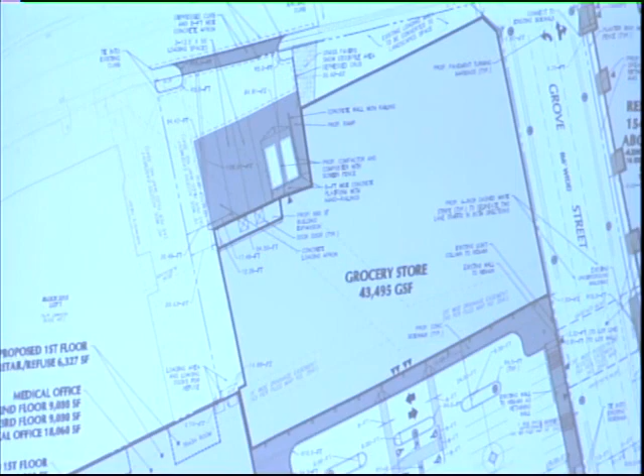Based on some comments we heard at the last hearing, and further discussions with some of the neighbors, we reevaluated how that truck access should work, how to make it more efficient, how to make it safer, how to make the pedestrian crossing better. So what we've come up with is a single driveway opening of now 78 feet, whereas before we had a 70-foot driveway and a 33-foot driveway. So the combined opening before was actually larger than what we have today, although in a single driveway it's larger than either of them were in this proposed condition.

What's shaded in gray along Glen Ridge Avenue would be a concrete driveway apron, so we'd have a formal depressed curb driveway apron to help identify the pedestrian way for pedestrians as they continue along Glen Ridge Avenue in either direction. It will be well marked.

The other difference that we've done is to accommodate comments regarding how we would deal with snow removal and can we create a stockpile area. And what we've done in this area on the east of the loading dock is to create a space.

It's about 550 square feet that would be curbed off on the loading dock side with the depressed curb. It would be grass pavers, providing an opportunity for snow removal and maintenance of that dock area to keep it open, and in fact the adjacent shared spaces without interrupting the landscape. So that's all new green space from the plan that was originally presented. There's no reduction in the landscaping along the Glen Ridge Avenue corridor as a result of that.

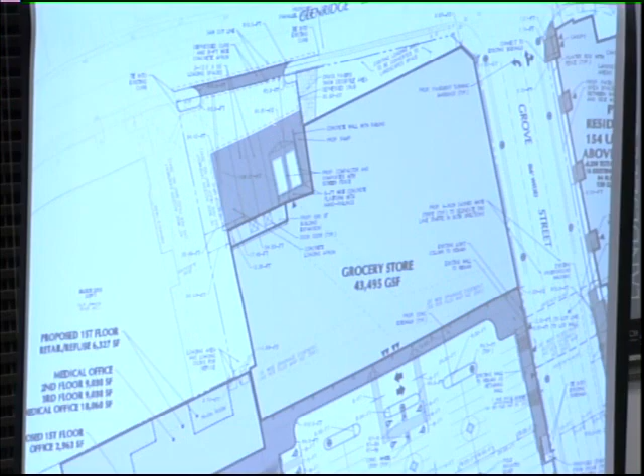There's also a ramp up that would be for essentially hand trucks and hand carts and things like that. There are opportunities for smaller trucks to park in front of the compactors to offload their smaller items without interrupting the activities at the formal loading docks.

We anticipate trucks would generally be coming from Grove Street to Glen Ridge, making a left onto Glen Ridge and then backing into these two spaces. The 78-foot wide opening we have does accommodate movements for those tractor trailer movements, so that if either one is occupied, the other is accessible. We have tested that with the large tractor trailers, the 53-foot trailers that are permitted on roads in New Jersey. We will certainly provide, as part of a revised plan submission, those truck turning templates demonstrating those maneuvers.

One of the other changes to this plan relative to what was previously submitted is there are 3 parallel spaces today along the southern side of Glenridge Avenue in the current island configuration. The prior plan would only preserve one of those spaces. This plan actually does that one better, so we lose only one - it's a net loss of 1 space were we to move forward with this alternative plan, with the board's wishes.

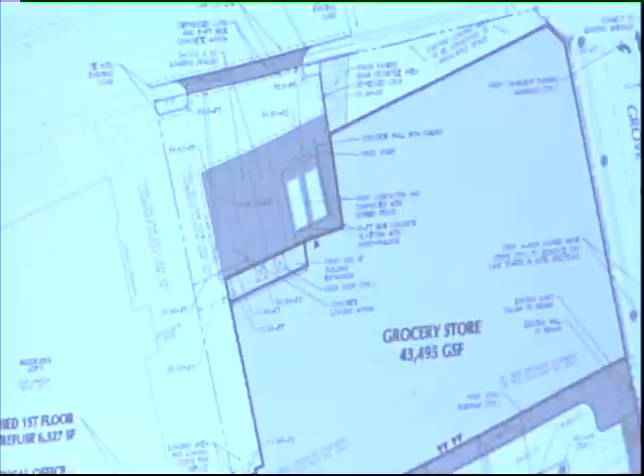So I have a question. At the last meeting, I asked, and I think this is for you, since you're talking about that area - are you going to prohibit the trucks from making a left-hand turn when they get out, so they're not going up Glenridge Avenue into the commercial and residential area of, I guess it's Greenwood?

What we've done is tried to do a regional analysis of where we think trucks would be coming to this facility from, and I generally agree with you that they'll be coming from Grove Street in a north-south direction, depending on where they're coming from, or potentially be better suited for Bloomfield Avenue. So we respect and understand that that restriction makes sense. The one thing we don't know, because we don't know who the tenant is, is exactly where their distribution facilities will be, so I think that's a common sense plan. I don't know that we're able to say there should be a formal restriction on that without knowing the tenant, but in general we would expect the traffic to turn right out of there.

Okay, but I would just like to make a note of it. I think it should be prohibited from making a left-hand turn, because a natural turn would also be a left into the residential area, or going up through Glenridge Avenue into the center of that corner where there's a lot of traffic issues anyway.

What about a certain size truck - I'm thinking the tractor trailers, right? Yeah, exactly, certainly that's our expectation in talking about that potential restriction on tractor trailers. Vans and regular box trucks could go, but when you're thinking big tractor trailers, when they're braking they make noise - you don't want them going through a residential area. No, they're very disruptive.

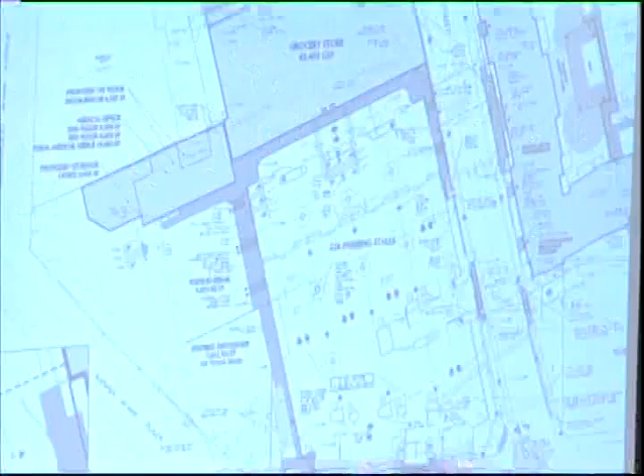We've confirmed that from Bloomfield Avenue, the ladder truck can traverse northbound through the main aisle, make a left-hand turn to park and put its outriggers out in front of the building, and can exit the site in a counterclockwise direction out through that same Bloomfield Avenue exit without any modifications to our current plan. There's adequate clearance to accommodate all those turning movements, and we have tested that. We will present those turning movements as part of a revised plan submission.

There was also discussion about fire lanes along the front of the building. The western three-quarters of the frontage along the grocery store would be striped as a fire lane. This eastern portion would not, frankly, because the fire trucks aren't accessing that area. So we're proposing to use this area outside the fire lane as a ride-share drop-off, loading and unloading space, providing the opportunity for an Uber or Lyft to pick someone up or drop someone off there. We could sign it appropriately. We don't intend these to be parking spaces per se, but they would provide that opportunity. It can be dedicated and signed in a way the board feels appropriate.

Do you know the size of that area you're talking about, how many cars? It's probably around 60 feet. So you could fit three cars there. Well, I would say two comfortably, maybe three depending on how cozy they get to each other in terms of parking.

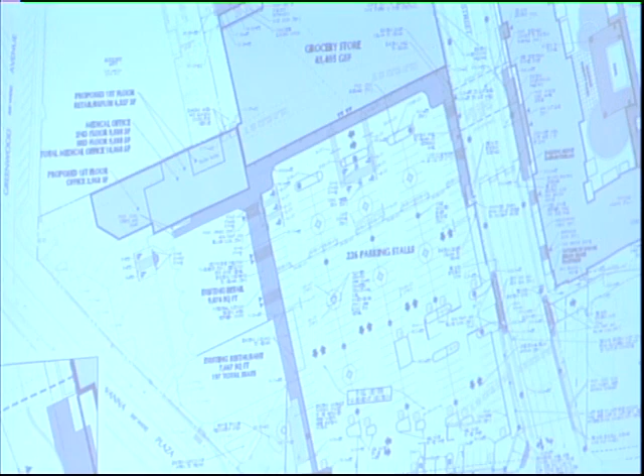I have a question about that. Where do you anticipate employees entering? Is there a separate employee entrance? That's where I can see a need for some employees to come by bike. Where would they enter the building, and how could a bike rack relate to that?

At this point we're not quite sure. That could be some tenant-specific requirements about how they may want to segregate employee entrances. I think your point's well taken, though, to the extent that can be identified, we can incorporate that opportunity for employees. Certainly I agree there's some opportunity there, particularly if they're local, since they're not the ones carrying groceries home necessarily.

In addition to employee parking, at some point I guess we'll talk about that? Not tonight, but yes, that's part of a future testimony by a traffic engineer. Okay, great.

I know there was some back and forth relative to an area we had identified on our site plan, an opportunity for seating on the eastern side of this retail space. That still exists. We wanted to clarify that we understand there's concern about potential incompatibility of the programming of that space — the type of seating appropriate for one tenant may not be for another. Without knowing who those tenants are, we want to create the opportunity, but the formal programming will have to wait until we understand the tenant mix, and it may even be specific to each individual retail space as to whether it's appropriate and how it can be designed.

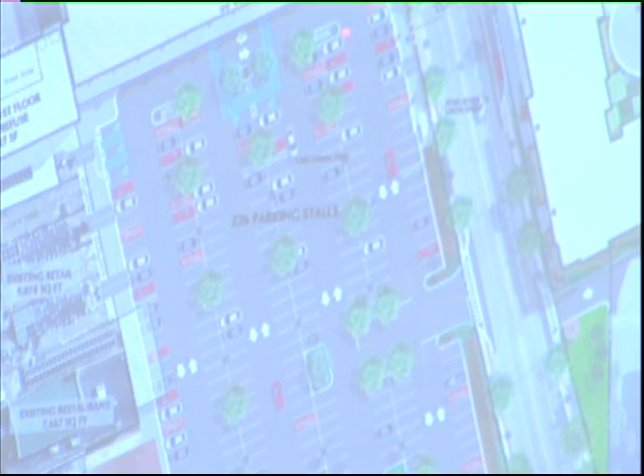And can you give the board the benefit of understanding in terms of trees being removed or replaced? Sure. There's a total of 30 trees being removed on site, and as I mentioned earlier, 48 trees are being proposed. And that's in compliance with the township's ordinance requirements on tree removal? Yes, it is.

So now, moving forward, I'd refer or ask the board to refer to the lighting plan that was previously submitted, LL 101. And there's an exhibit on the screen—is that the same exhibit that was submitted with the board's package? Yes, it is. It's drawing LL 101.

So could you please describe for the board the existing lighting and any proposed changes with regard to fixtures and light levels for the parking areas, sidewalks, and residential amenity deck on the east parcel? Sure. The streetscapes are typical public service cobra heads, high-pressure sodium. Within the parking lots, they're the old shoebox style, I call them—the square heads. They're in very poor condition. That's on both lots, that fixture style.

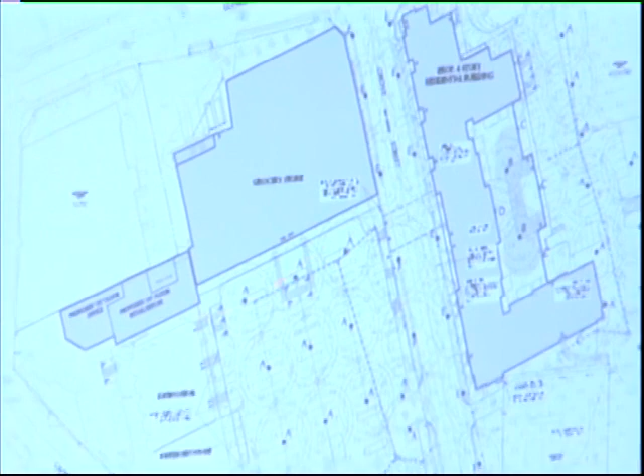Can you describe the location of the decorative street lighting with respect to the frontages along Lackawanna Plaza and Glenridge, west of Grove? Sure. The lighting is basically type E and F fixtures going down Grove Street, and Bloomfield Ave has the same fixture. At the corner of Lackawanna and Bloomfield Ave, in the plaza, there are two existing lights off-site that will be maintained, so there'll be adequate lighting in that plaza area, and the rest will be contributed by the decorative lighting.

What's the intensity in the plaza—how many foot candles? The intensity in the plaza from the point-by-point calculation shown there does not include the lighting from the street, so it's a little lower than just 2 foot-candles, but with the street lighting it would be higher and meet the town's requirement.

So would it be fair to say that with modeling we believe we'll meet the required foot candles, but to the extent we don't meet it, we would accept as a condition of approval that we'll comply? Correct.

I think you should show a plan that demonstrates compliance.

Revise it to show that you comply. We'd have to reach out to Public Service to see if we can obtain those photometric files and run them in our calculations. Get them all.

If you don't mind, I ask this question. How come you don't extend those decorative street lights along Lackawanna Plaza? Basically, because of the size of the plaza, if you start adding more poles in close proximity, the lighting levels may exceed that 2-foot candle requirement. I know we're a little high just at the entrance area here, but that's basically one of the reasons. I'm talking along the street, Lackawanna Plaza. I believe that's outside of our site, so we weren't going along Lackawanna going north.

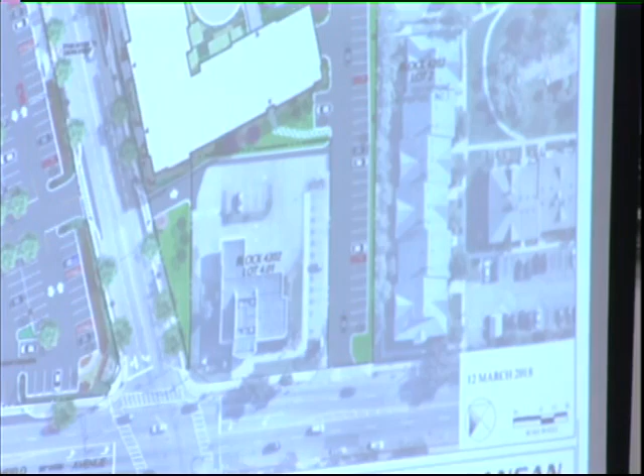Was that condition modeled? What condition? Turning into the TD Bank parking lot from Grove and accessing your new site building? I would not expect much of our traffic doing that. I mean, they could, but to me, if I'm coming eastbound on Bloomfield Ave, that seems to be the easiest way to access the residential building.

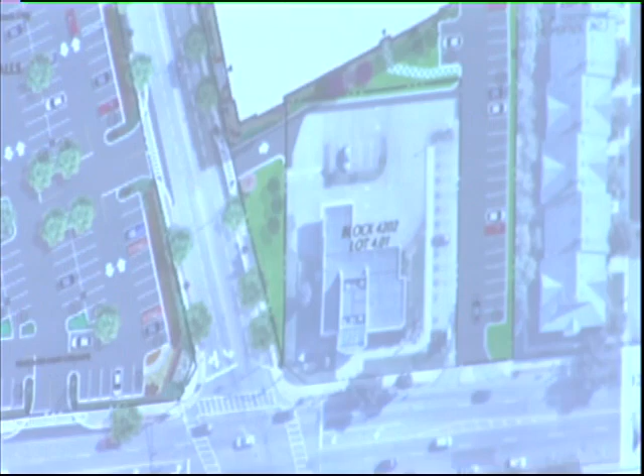I mean, if they did it, it's a right turn in, it's an unrestricted movement, so it's not a level of service issue. It's a free flow movement for all intents and purposes. Does that affect the amount of traffic you would expect on Grove? It would—let's say the traffic that we anticipate to come in from Glenridge, it would just reduce that traffic flow.

Okay. Other questions from the board? Couple on the Glenridge side. We were talking earlier about the practicality of a mid-street crossing. What are your thoughts on that?

So in this particular location, we have a traffic signal with established crossings. That provides a good crossing right in the project area, and then we have crossings established at the legal crossing areas at Lackawanna. So we already have good pedestrian crossing at statutorily approved and legal crossing locations. I would not personally recommend or suggest that a mid-block crossing be incorporated. I don't think it's needed. There's really no desire line from the back of our building for any activity to directly cross

to the post office or the mortuary. But mid-block crossings are used when you have a real crossing desire line. I don't see it here.

Now, they're talking about this area for loading and unloading. Is it going to be sufficient for tractor trailers and for all of the smaller types of trucks like Frito-Lay? Yes, I've been working with Mr. Webb on the layout and design of that. We believe it is correct.

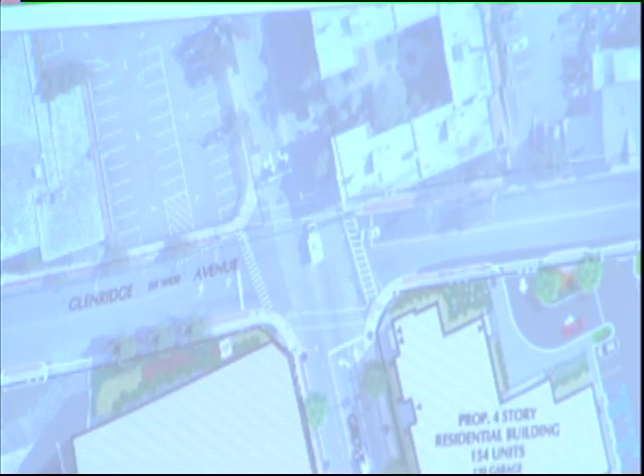Is that intersection also subject to this county grant, or is it just separate? It is not part of the county's program at this point. Similar to the striping, subject to county approval, would you agree to at least provide those timing changes to the county? Yes. But just a quick follow-up question, to make those timing changes, will the county have to put in new signals? They can use the existing signal infrastructure and just make the timing change. Correct, it's just a program adjustment. My concern is I want to make sure that information gets to the county. Absolutely, so they can take it into account.

In my latest review memo, I mentioned something about the possibility of 2 lanes coming out of driveway 5, which is the shopping center driveway on Grove Street. Did you look at that at all? We did look at that, to accomplish it, and it actually goes to the parking conversation, so we may want to defer it a little bit to the next time. It can be accomplished. I understand what Mr. Fishinger is asking for is that we create a left turn lane and a right turn out of the driveway. Physically, it can be done. The impact is probably the loss of 1 parking space. I wouldn't say no at this point in time, but I think we'd like to roll that into the conversation and discussion on the parking supply before we commit one way or another.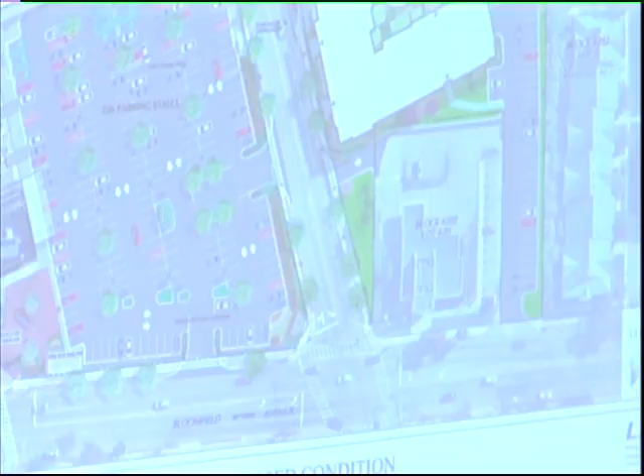Just one more question. So you expect all the residents of the new building to go down and use that tunnel rather than crossing mid-block? Yeah, I would expect people are going to take advantage of a direct crossing, a safe crossing. I certainly would not expect them to try to cross Grove Street mid-block. If anything, you would use the traffic signals like anything that's developed. But in this particular case, we have the advantage of a rather significant feature that they'll have access to directly.

Any possibility for a left turn lane into the parking lot? In effect, by doing the 4 lanes, you're actually creating the ability to have that left queue occur while having through vehicles bypass it. So that's one of the reasons for the 4 lanes. It creates that ability. You're in effect creating that opportunity, but not completely restricting it.

Are you anticipating any signage that would tell people they can make a left turn there? No, it's just like any driveway, they just know it. Yeah, we try not to oversign.

Other questions from the board? Questions from the public concerning the traffic testimony?

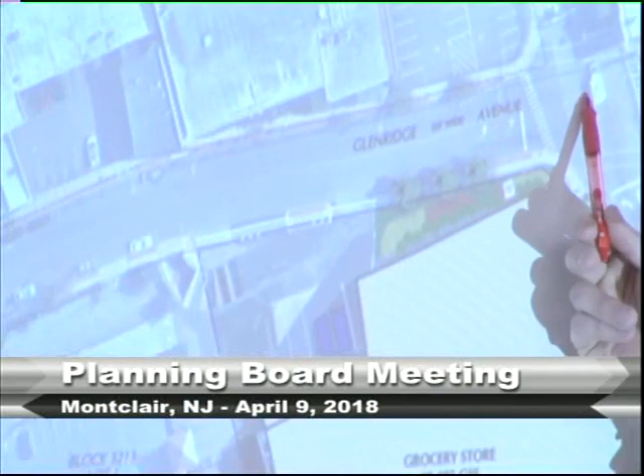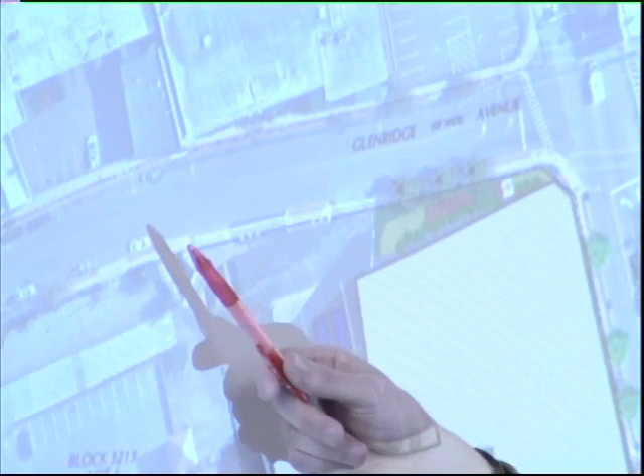I don't know whose testimony was before, maybe it was Mr. Webb, said that these bays previously had been articulated this way. Is there any virtue in having the tractor trailers come into your property and back into bays, as they currently do? Because otherwise, that's exactly the problem, coming up Grove Street, Glenridge Avenue, backing up into traffic where the post office is, into these bays.

Yeah, that's a configuration that hasn't been working, particularly for the adjacent property owner, and actually doesn't work for the current layout of the types of tenants we've been talking to for the site. What we propose, we believe, works, is efficient, and actually addresses some of the prior problems that have existed on this property and our neighbor's property.

Have you explored the legality of a tractor trailer backing up into traffic from Glenridge Avenue into that site? It's a public right-of-way, happens all the time. It's a legal means by which tractor trailers could back up into traffic to access that site? You can move in and out of driveways on a public right-of-way, yes.

I can't imagine that the township is cool with tractor trailers backing up into traffic. Could we find that out? As the attorney for the, I don't think there's a legal answer to that. I think that's engineering and traffic. With all due respect, thank you for asking me that. Okay, I think we should probably find that out.

There's no prohibition.

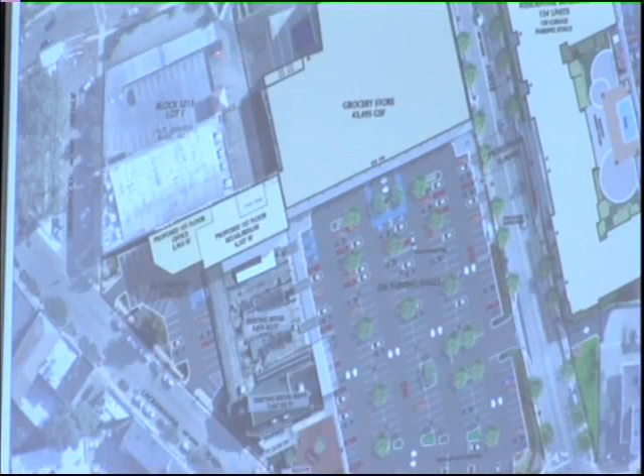There used to be a fence here, so the trucks did used to come in, but they would pull back out, I don't know your name, sir, and they sort of made a U-turn within the parking lot and came in toward the fence and then backed up this direction. When the fence came down, they came underneath, and it became convenient for a lot of years.

My question, that's just in terms of history, what used to go on. My question again, Mr. Engineer, I'm sorry I didn't recall your name, but in terms of the mid-block crosswalk, I've seen your 119 pages of traffic work. Do we have an actual count of the number of vehicles on Glenridge Avenue between 8 a.m. and 6 p.m. each direction? Well, we have hourly volume.

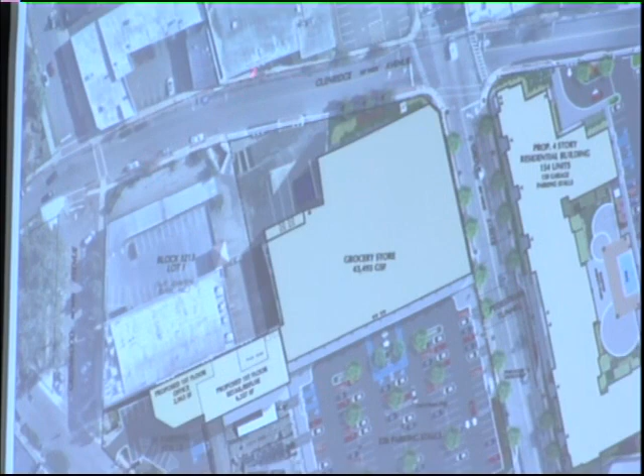We multiply that out by more or less times 10? It wouldn't be that. Your peak hours are actually quite pronounced. Hourly wise, there's probably peak direction, roughly 300 to 330 vehicles peak direction on any given peak hour.

So when the articulation drawings are done, I'm sure it'll be done in the context of how long it takes to do the movement to back up and come in, and what happens again when vehicles come behind that vehicle, and then if another truck comes in and can't get out, the vehicles behind. My question,

again, is the possibility of looking at restricting large trailer truck traffic during the day. There have to be other evidentiary examples throughout the state of such restrictions. We know in residential areas they're not going to allow it at night. The question is, can we possibly look into, I know we don't have the supermarket, the possibility of restricting large trucks during the day? We're not proposing it, and quite frankly, that could impact the ability to attract a user of this site. To have a successful center, it needs to function in accordance with how they operate their facilities. What about restricting the deliveries to avoid the peak hours of traffic, which you say are pronounced?